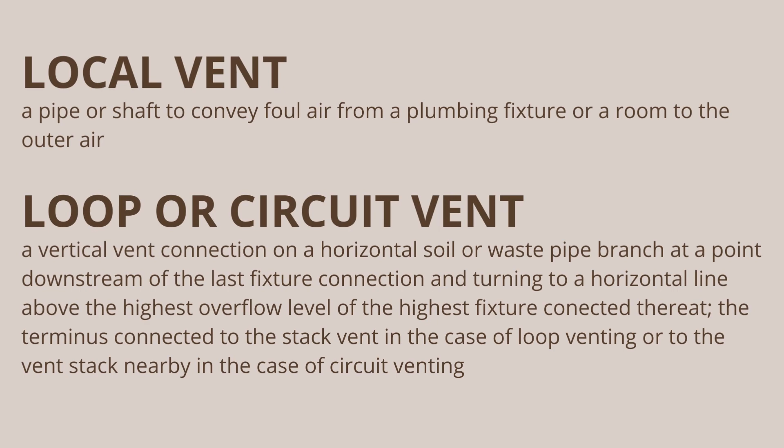Loop or circuit vent. Macerating toilet system. It is a system comprised of a sump with macerating pump and with connections for a water closet and other plumbing fixtures, which is designed to accept, grind and pump wastes to an approved point of discharge. Macerating toilet system. Main. The term used in any system of continuous piping, which is the principal artery of the system where branches are connected.

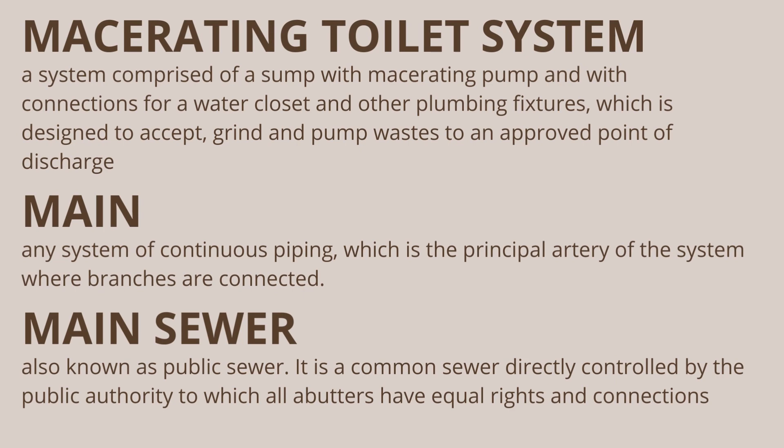Main. Main sewer. It is also known as public sewer. It is a common sewer directly controlled by the public authority to which all abutters have equal rights and connections. Main sewer. Main vent. It is the principal artery of the venting system to which vent branches are connected.

Main vent. Manhole. It is a large opening in a sewer line or part of a plumbing system constructed with sufficient size for a man to gain access therein for maintenance purposes and facility for changes of line and or grade of pipeline. Manhole.

Master plumber. It is a person technically and legally qualified and licensed to practice the profession of master plumbing without limitations in accordance with Republic Act 1378, having passed the examination conducted by the Professional Regulation Commission, has received a certificate of registration from the Board of Master Plumbing and possesses the current license to practice. Master plumber. NAMPAP. It stands for National Master Plumbers Association of the Philippines.

NAMPAP. Oakum. It is a hemp or old hemp rope soaked in oil or tar to make it waterproof. Oakum. Occupancy. The purpose for which a building is used or intended to be used. The term shall also include the building or room housing used. Change of occupancy is not interpreted to mean change of tenants or proprietors.

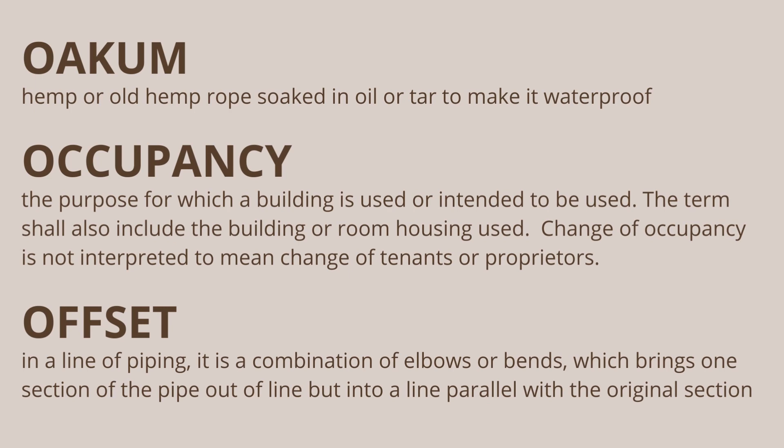Occupancy. Offset. In a line of piping, it is a combination of elbows or bends, which brings one section of the pipe out of line but into a line parallel with the original section. Offset. PB. It stands for polybutylene. It is a tube made of plastic material and colored black. The cross-sectional shape is normally oval and is denoted by its outside diameter, or OD. Normally used as water service connection from main to meter.

PB. PE. It stands for polyethylene. It is a tube made of plastic material and colored black. The cross-sectional shape is circular and is denoted by its outside diameter.

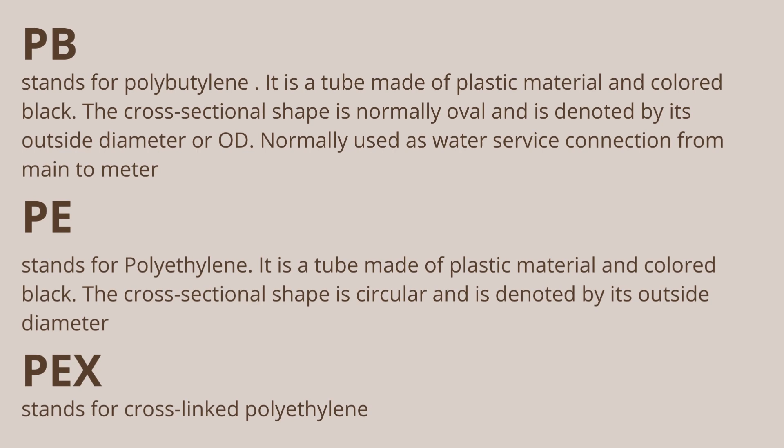PEX. It stands for cross-linked polyethylene. PEX. Pitch. It is also known as grade. It is the slope or fall of a line pipe with reference to a horizontal plane.

Pitch. Plumbing. The art and technique of installing pipes, fixtures and other apparatuses in buildings for bringing in the supply, liquids, substances and/or ingredients and removing them. Plumbing. Plumbing appliance. Any one of a special class of device or equipment intended to perform a special plumbing function.

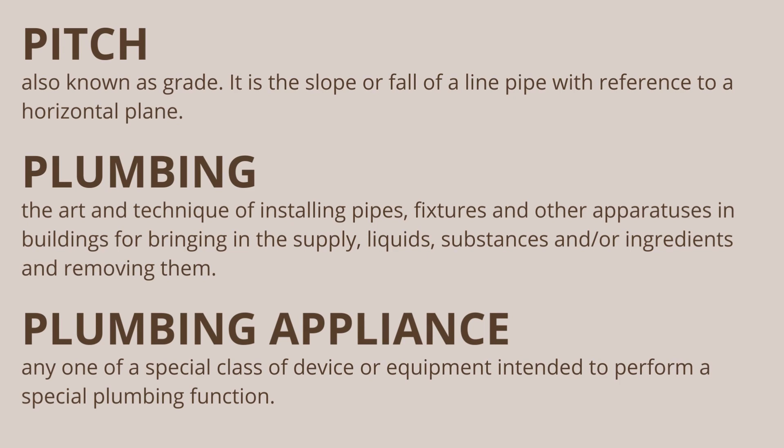Plumbing appliance. Plumbing appurtenance. A manufactured device or a prefabricated assembly or an on-the-job assembly of component parts, and serves as adjunct to the basic piping system and plumbing fixtures. Plumbing appurtenance. Plumbing firm. It is a sole proprietorship or corporation composed of registered and licensed master plumbers together with allied professionals. Plumbing firm.

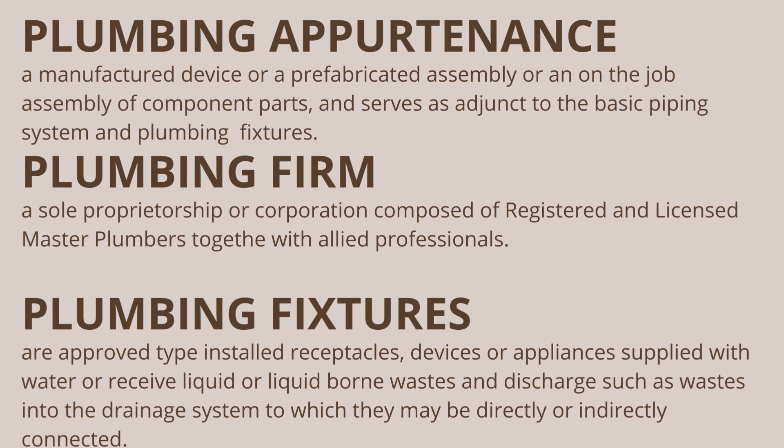Plumbing fixtures. These are approved type installed receptacles, devices or appliances supplied with water or receive liquid or liquid-borne wastes and discharge such as wastes into the drainage system to which they may be directly or indirectly connected. Plumbing fixtures. Plumbing official. The administrative authority or the officer charged with the administration and enforcement of the National Plumbing Code, or his regularly authorized deputy.

Plumbing official. Plumbing system. It includes all potable water supply and distribution pipes, all plumbing fixtures and traps, all sanitary and storm drainage systems, vent pipes, roof drains, leaders and downspouts, and all building drains and sewers. Plumbing system. Plumbing unit. A minimum standard quantity of plumbing fixtures that discharge wastes into a plumbing installation including 1 water meter, 1 water closet, 1 lavatory, 1 shower head, and drain for a bathtub or shower stall, 1 kitchen sink, 1 laundry tray, 3 floor drains and 4 faucets.

Plumbing unit. Pollution. It is an impairment of the quality of the water to a degree which creates hazard to the public health and adversely affects the aesthetic and potable qualities of waters for domestic use. Pollution. Potable water. It is the term used for water satisfactory for drinking, culinary and domestic purposes and meets the requirements of the Philippine National Standards for Drinking Water.

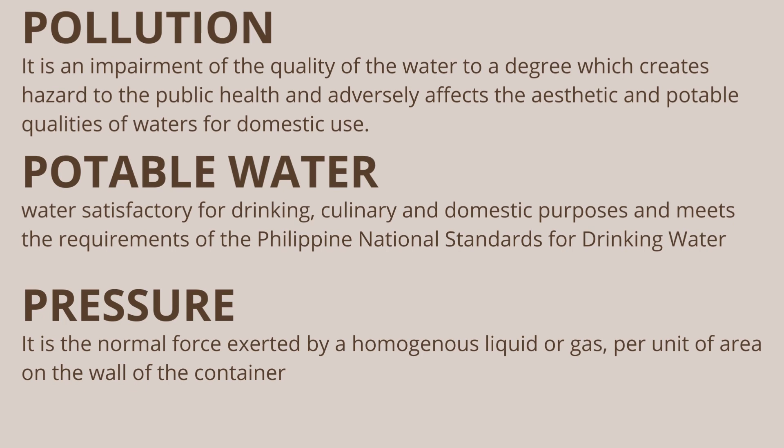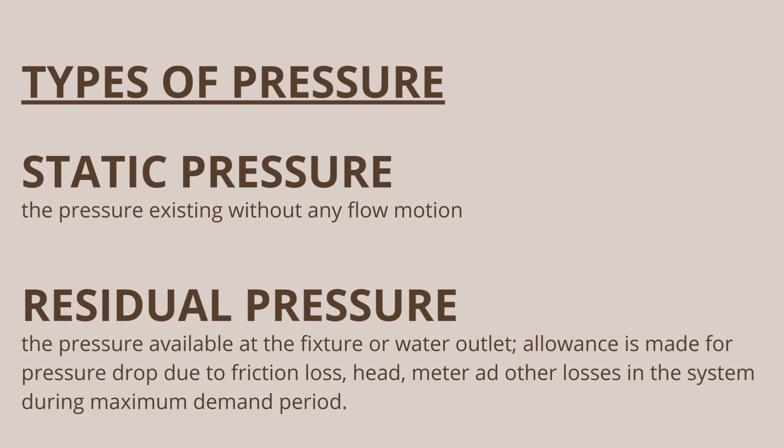Potable water. Pressure. It is the normal force exerted by a homogeneous liquid or gas, per unit of area on the wall of the container. Pressure. Note the 2 types of pressure: the static pressure and residual pressure. Static pressure. It is the pressure existing without any flow motion. Static pressure. Residual pressure. It is the pressure available at the fixture or water outlet. Allowance is made for pressure drop due to friction loss, head, meter and other losses in the system during maximum demand period. Residual pressure.

Primary branch. It is the single sloping drain from the base of a stack to its junction with the main building drain. Primary branch. Private or private use. In classification of plumbing fixtures, it applies to plumbing fixtures in residences and apartments, to private bathrooms in hotels and hospitals, to restrooms in commercial establishments for restrictive use. Private or private use. Private sewage disposal system. It is a septic tank with the effluent discharging into a subsurface disposal field, into one or more seepage pits or into a combination of subsurface disposal field and seepage pit or of such facilities as may be permitted.

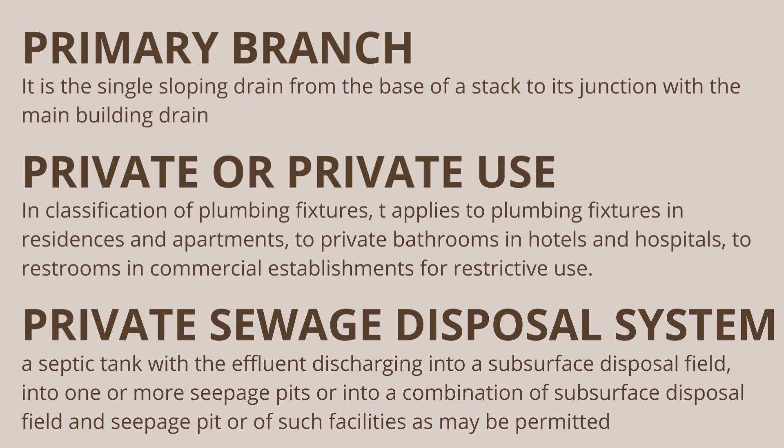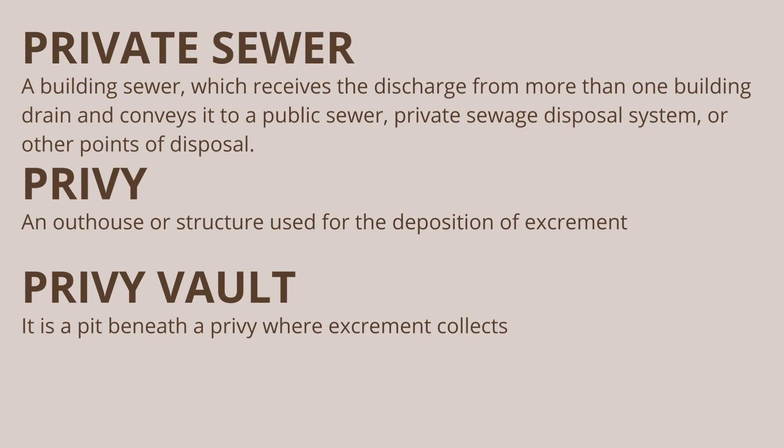Private sewage disposal system. Private sewer. A building sewer, which receives the discharge from more than one building drain and conveys it to a public sewer, private sewage disposal system, or other points of disposal. Private sewer. Privy. It is an outhouse or structure used for the deposition of excrement. Privy. Privy vault. It is a pit beneath a privy where excrement collects. Privy vault.

Public or public use. In the classification of plumbing fixtures, it shall mean all buildings or structures that are not defined as private or private use. Public or public use. Public sewer. A common sewer directly controlled by public authority to which all abutters have equal rights of connections. Public sewer. PVC, it stands for polyvinyl chloride. Potable water piping are color-coded blue while drain pipes are gray, orange or brown.

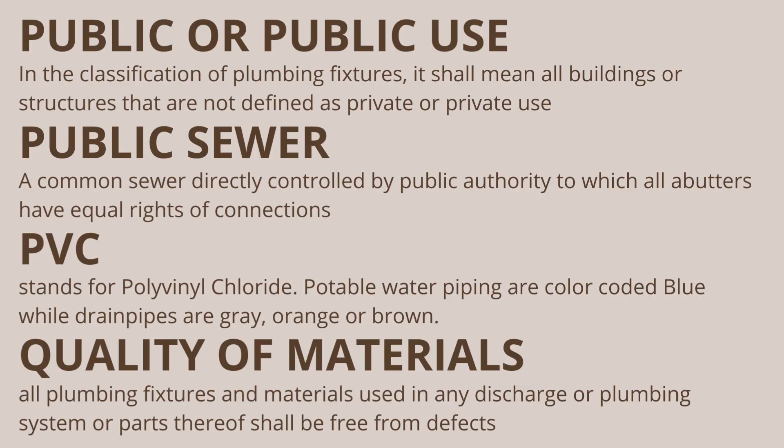PVC. Quality of materials. It states that all plumbing fixtures and materials used in any discharge or plumbing system or parts thereof shall be free from defects. Quality of materials. Break time! Definition of terms part 4 will be on the next episode.